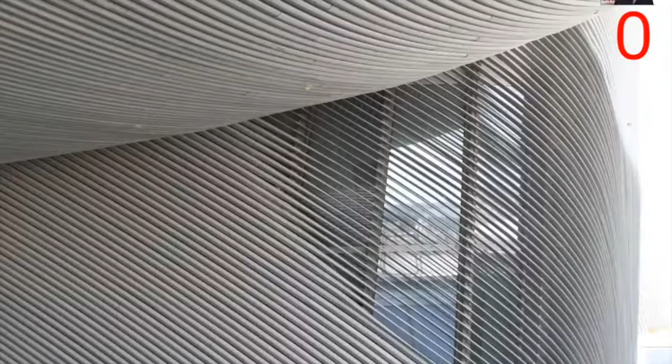In the first part of the presentation, we saw that the textile industry is quite important in Hong Kong, and indeed the client of the project I'm going to show you is itself a textile company. But in Hong Kong, you don't just do one business or industry, so they became a real estate developer. For them, Nan Fung, that's the client name, textile becomes very important because they're from there. To them, it's more of a past normal.

This is one of their factories in Kowloon, Hong Kong. It's redeveloped into the mills, which houses a lot of interesting spaces.

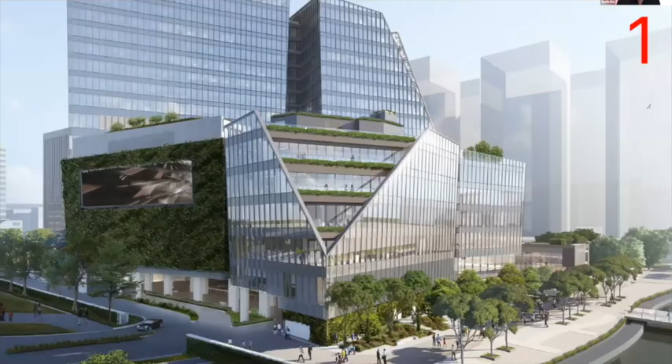Of course, you can see the kind of weaving in this project, the fluted or curved curtain wall. So it becomes a kind of amalgamation of modern building technology, especially prevalent in Hong Kong, which is the curtain wall itself.

Its relationship with, number one, the motif, which is the fabric; number two, the material itself; and number three, the form.

And somehow it's more than that, because in Hong Kong usually, as you saw with these really tall towers, it's typically a podium tower, a big podium with almost 100% site coverage, and then you put a tall building on top.

But this is kind of different, because you can see the ground is actually freed up, and you have two levels: one on the podium, one on the ground. So we have more opened-up spaces for the public, not just on the ground, not just outside the gated community—this is not gated at all.

And also on a podium. It's not just that these two grounds are freed up, it's also that there are relationships between these two grounds.

If you approach from the ground, you can actually go into the mall, which is also a kind of public space because in the lease, basically the public access needs to be allowed. And you go into the crack in between and you can freely go up to the podium.

So you actually develop a kind of sense of belonging to not just your space, the space that you live in, because after all, it's quite, as I said, not much spatial experience, but then you can actually venture out to feel that you own some part of the community. This is actually a project in Kai-Tak.

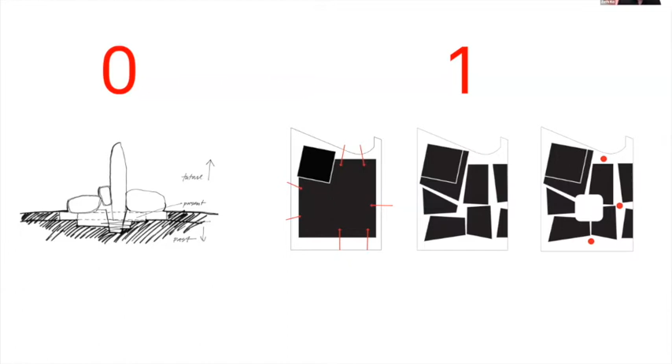Kai-Tak is the old airport of Hong Kong. So it closed, it basically moved to the new airport in 1998, and it took around 20 years to develop. So it's under progress, it's under construction. It's gonna be finished next year, late next year.

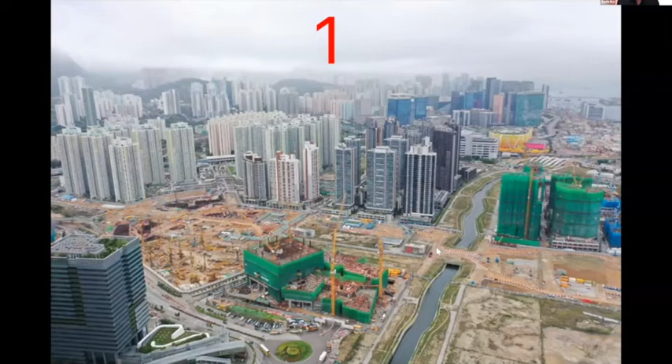So things haven't really stopped for this project because now you have a lot of intensive BIM coordination, and of course with the help of online conference softwares, it's kind of easier. So the construction is still ongoing.

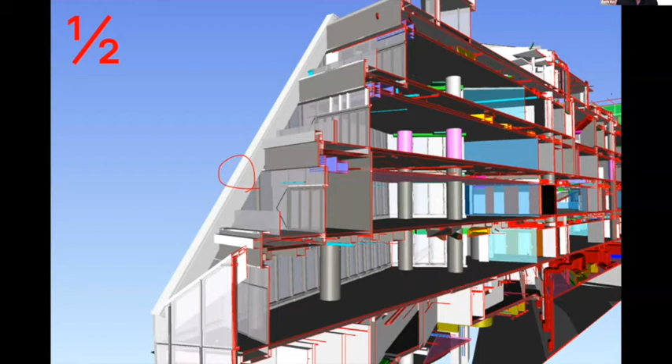But it's funny that I think in a week, the contractor had problems finding small aggregates for concrete, but then after 2 days, they got over it, they're okay.

But in the other end of the city, the business are not as vibrant or as normal, or not business as usual. Restaurants. So what can we do as young architects to aid or to facilitate basically these businesses so they don't suddenly get out of business?

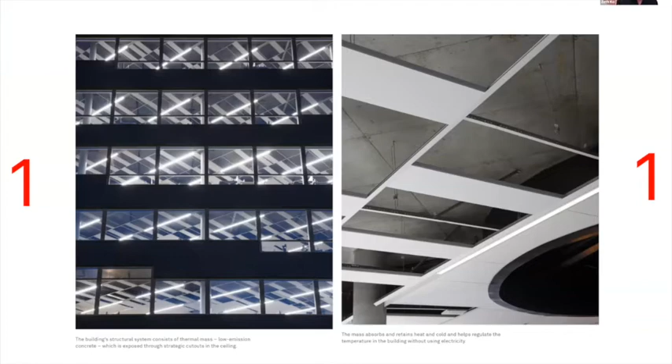So the fourth thing is the workplace. 50 years ago, or the past normal, is that we had drawing boards all the time.

So these tools don't just take care of the work you produce, but also take care of you as a healthy person and a person with well-being, so you can proceed with the creative work or design you're doing.

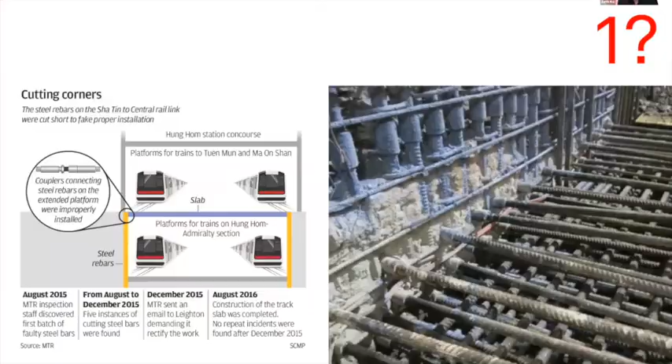So now that we pay so much, what do we get? I think this is a new normal. Would it be a new normal to me that we need to be ready to accept a higher level of defects and longer construction periods in Hong Kong?

And for young architects, the route - well, number one is that people might not understand so well. They would question the costs and efficiency. Number two is that some of them might not understand it takes a long path in our career to reach certain milestones.

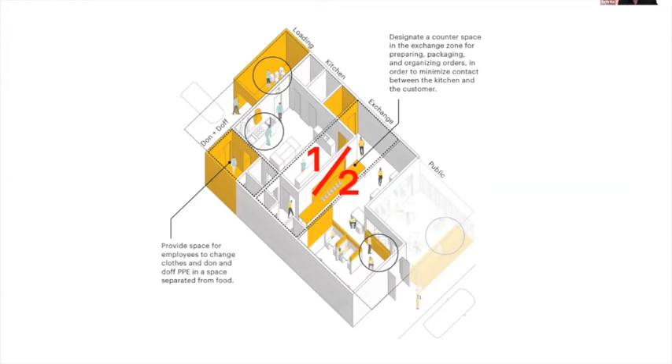So if we look to the future, what will it be? How will it be like? So the three things I think, as young architects, these are quite important and easy to achieve things that we can do with a bit of creativity. Well, the restaurant, the hospital, maybe the mass production facilities - I think that we can facilitate.

But of course, as architects, I think our strongest suit, or one of the strongest suits, should be design. So apart from building components or things directly related to building, what can we do?

This is a building in Taipei, it's called the EcoARK. What's interesting about it is not just the mass or massing itself, but also the facade treatment. These plastic bottles amount to around a few millions. So the insulation and facade enclosure is achieved by these plastic bottles, done by a firm called Miniwiz.

I think in terms of sustainability, one important part is recycled materials. So in this case, I think it's a good example for us to start to rethink how recycled materials can be used in architecture, especially for things like this.

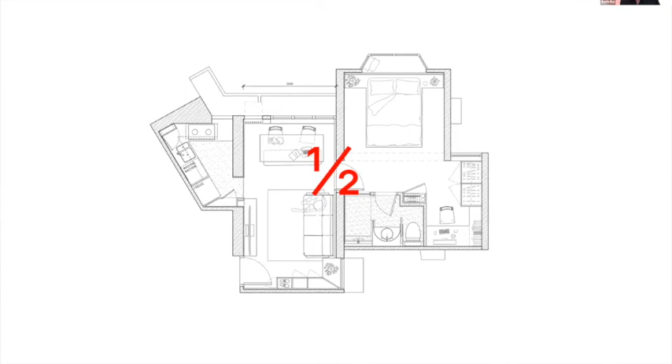And shop front design - this is a design I was doing with a district councillor. I think an out-of-the-box way to approach architecture is to deconstruct it in a way. So facades, shop fronts - I think this would be quite important for people living in the city. And of course interior design might be one way to go, given how much the pandemic is really affecting us - then what can we do?

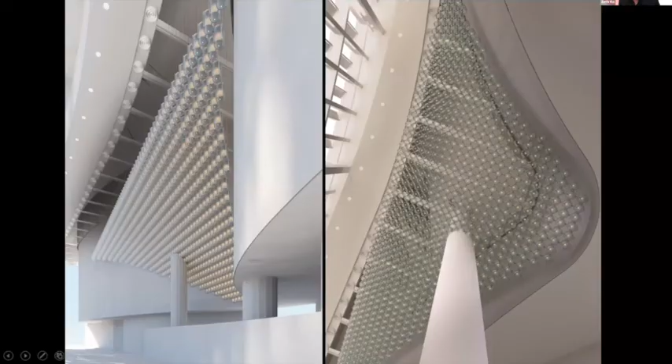And last but not least, I think this is actually the most important. So remember, we were talking about the public housing estates in Hong Kong, 50 years ago? I was doing this competition with a motif, or starting element, from the public housing estates. This is actually a shading device or brise-soleil in one of these more typical public housing estates. Using this, this competition entry made a lighting feature out of the motif itself - a lighting feature in a cultural center in Hong Kong.

So why is it most important? It's not just this project, not just this public housing estate in Hong Kong. I think the most important thing is that we still actively participate in competitions, because that's something quite unique to professionals. Now that we have more time at home and can't really go out, I would encourage young architects to really do competitions or design at home.

I think one of the reasons our office is not that affected by the pandemic is that we actually do quite a lot of design work on the design aspect of architecture. So we get a kind of flexibility to be somewhere that's not very specific, so we can still do our work, while some other work is, of course, limited geographically.

So looking forward, nobody really knows. Do we still need these tennis rackets so we can protect ourselves? Or do we even need hockey sticks? No idea. But of course, there are things that we definitely might not want in our future.